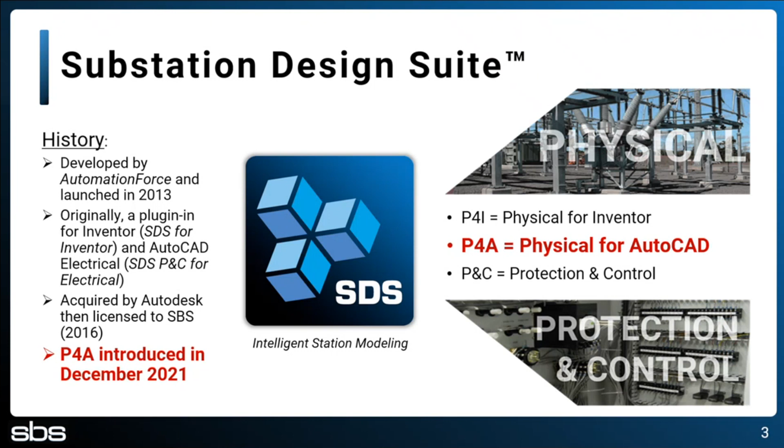Why P4A? So here's a slide where we're trying to show the reasons why we invested into this solution, to be more flexible and also be customer driven. As the customers face challenges, we try to be there with them. We have an estimated about 500,000 people every year, professionals being trained in AutoCAD.

So it's a huge pool of users, great interoperability with civil surfaces in P4A, underground conduits and conductors, georeferencing. There's a lot of capability in P4A that we're just opening up the ability to connect to other tools from there, more direct integration also with the P&C products, the protection and control.

It was a customer requested alternative to SDS in Inventor as well, so this is something that we're, again, doing to keep up with customer needs and wants.

There's also a very big reason for SBS to invest in this, because we are using the code base for AUD, another product for distribution, for all the testing and development. There's a lot of cross-discipline synergies, even users that are familiarized with AUD can move on to P4A, or they can talk to other users that are starting in P4A. So there's a lot of cross-training that can happen.

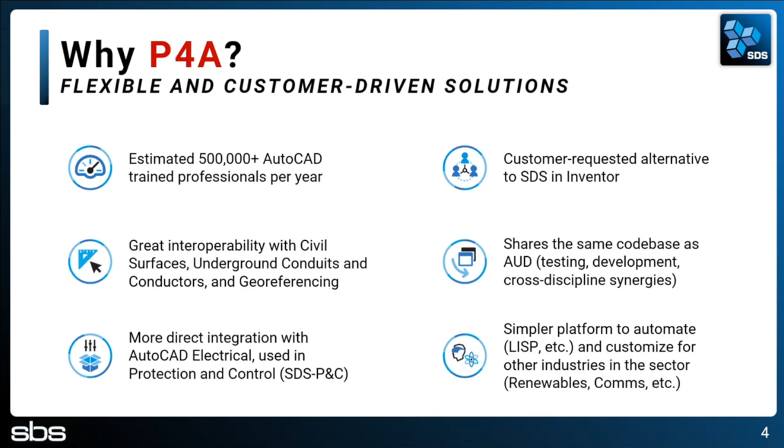At the end of the day, also for future developments, there's a simpler platform in P4A based in AutoCAD Map 3D. We have a platform that can be automated easily, can be customized, and can be also expanded to different industries, which are seeing more attention now.

So P4A has what I like to say 4 pillars here. Just to give an overview for those that are not too familiar, there's an industry model, which is a database embedded on the drawings, a material catalog, which is part of the configuration and goes in your drawings, and a part editor, which you add 3D models that you use as features in your design.

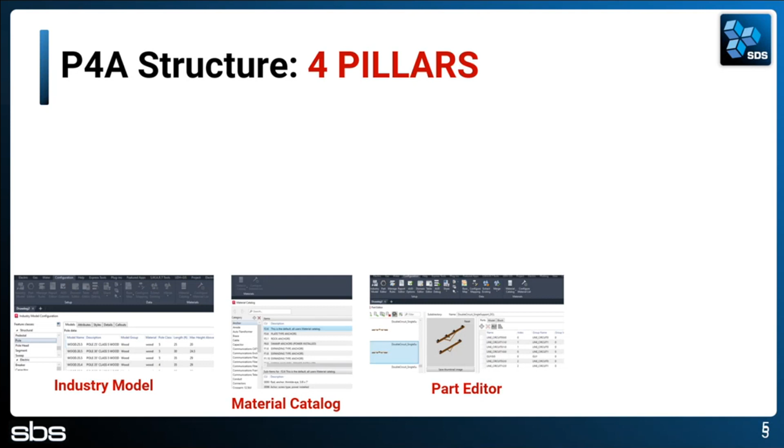And you also have the rules engine, which is where you can really configure a lot of the new functionality or a lot of the standardization, like all the standards from a company can be moved into a rule, and that becomes something that the users will be able to implement without even thinking, because the tools already take care of that.

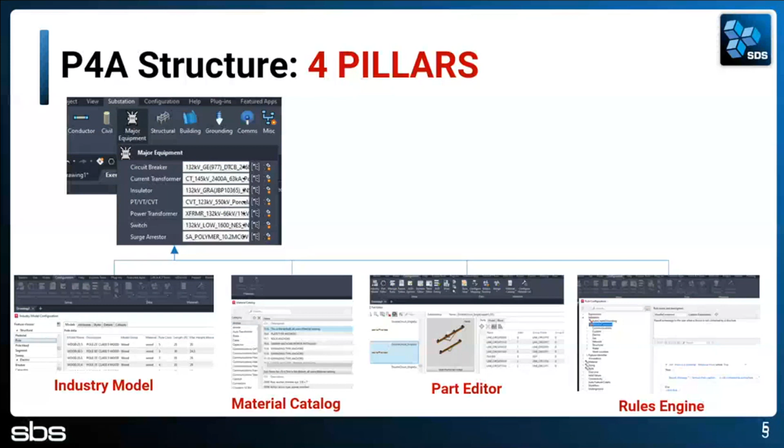So that all feeds into this sort of ribbon, and the pick menu where you're going to be picking your models and features to place them on your design. What I like to say is just pick, place, and connect. Should be that easy to form your 3D models and substation design. Once that is done, you adjust, describe, dimension your drawings, validate, and plot. And there you go, that's how the workflow should be going, right?

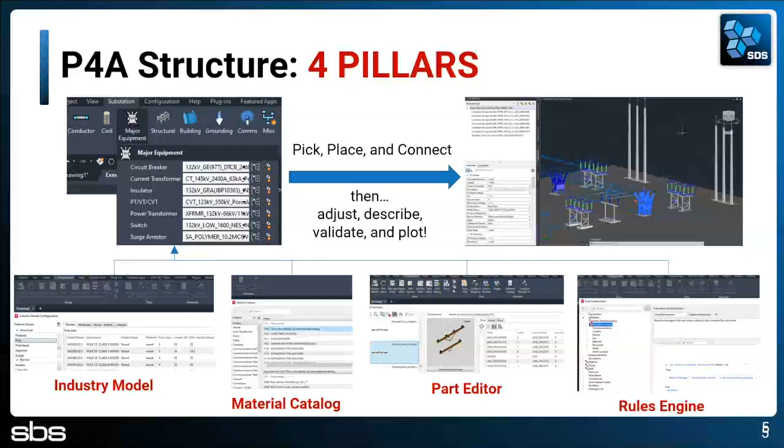So those are the major features. But we're here for a status update, so I'd like to give you some of the recent improvements for the past year, or mostly the past 6 months or so, recent improvements and highlights of those.

I know David also gave a preview of AUD and P4A status update on development, and it covered some of these points, but I'm trying to share here some of the workflows with videos, so for the users to be more aware of how these are actually applied.

So there's a quick little improvement here, which is the recent and saved filter attributes. So this basically saves you time.

Just go through the demo here. So when you're picking, let's say, a circuit breaker, and you have to type in a description for dead tank, and you're doing that once, you're going to place your feature in design. I'm picking something big so it can be easily visualized with an example. And if I want to pick another dead tank, I would have to type it again.

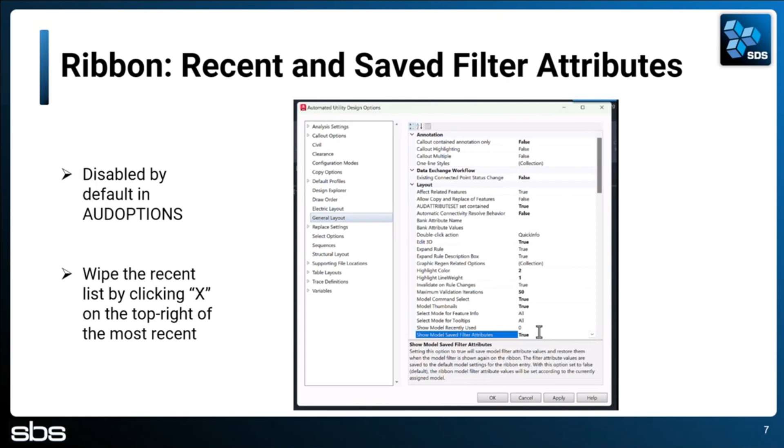So just to save a little bit of time, there's this save filter attributes, which goes into the AUDOPTIONS menu. Scroll down there, you see you can turn it to true. And once you turn it to true, it'll save the last used filter. And the recent number that I altered there will save all the last used features or models that you picked.

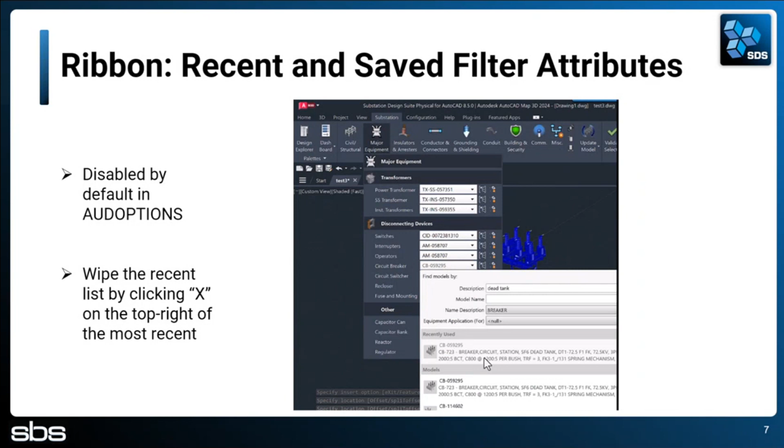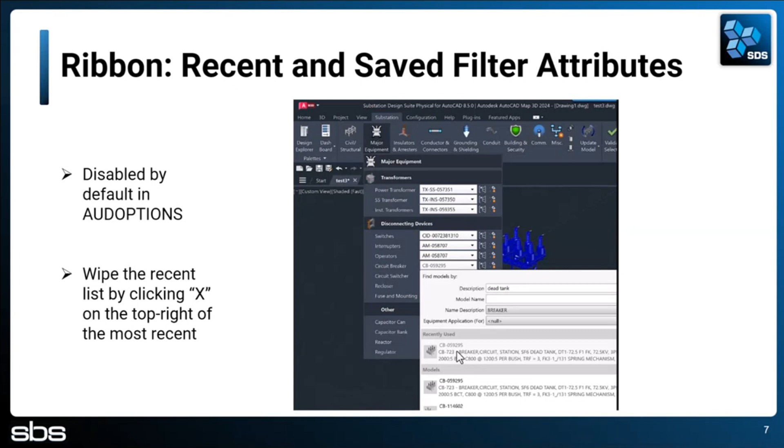So right now, the attribute right away has a description already picked from before, already saved. But once I pick and place a new feature on the design, I go back, I see the recently used. And if you want to wipe out the list, you can always click on the X button that is on the top right of that most recent. So quick and easy, just functionality to save time.

Now, there's another functionality David covered before. I'm going to give a quick example here. When you have, let's say, stacked connectors to bypass, or situations where via design sync, you're trying to match whatever you're designing P&C, and you're trying to keep that in your physical representation. Maybe you need to bypass some of the logical connection there, and you need a different logical connection to the physical one. So I'm going to give this quick demo.

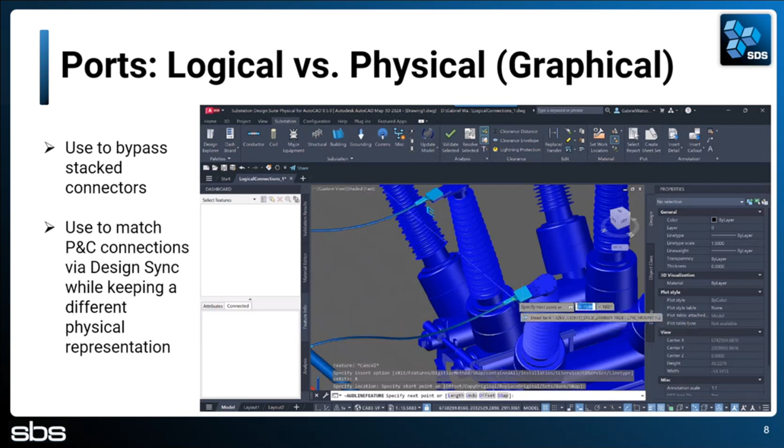So I have a sample that we use for training here. And what I'm doing is I'm going to be placing that conduit there, and connecting to the other dead tank. But at the end of the day, it's just an example to show the cable is going to be created. So the logical and physical connections are created all at once. And if I select, I can see on the dashboard on the connected tab, I can see the connections there between the two dead tanks.

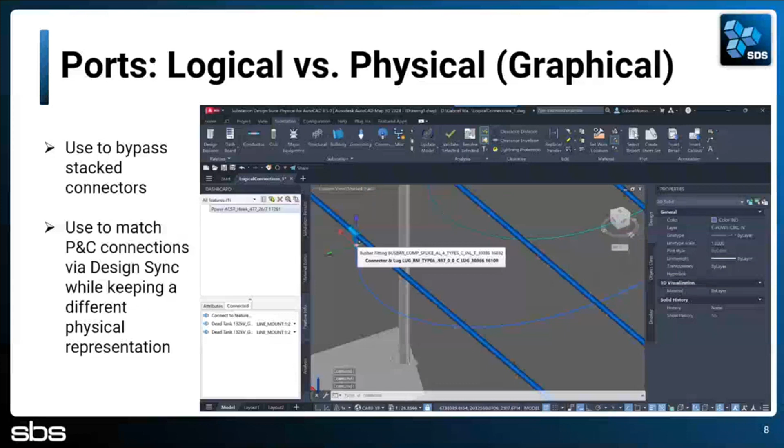And the physical connection or graphical is obvious there, but I can click on the button to remove the physical graphical connection and link it to something else. But that does not remove the logical connection between the two dead tanks. As you can see, they're still connected to each other. So this is just a sort of a workaround if you need to bypass. There are many connectors stacked, or in some situations we found the clients needed to do that.

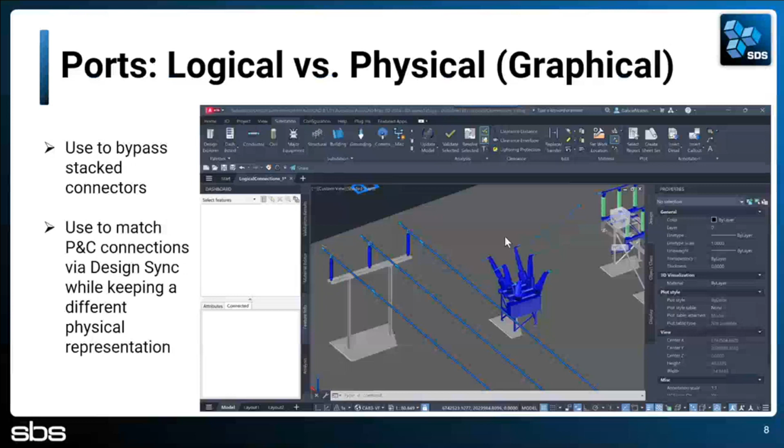There's a demo here on below grade conduit. So by the way, I'm just gonna roll back one second here. Any questions so far? All set. This other demo is about 4 minutes, so let's, I'll try to describe here. So for below grade conduit, there is a new workflow.

First step along the lines is we're setting up the trench first. So we do not want to place the conduit right away. I'm placing the number of rows and columns. I have to place the maximum number of rows right off the bat, number of rows and columns, the maximum that you will be used for the network. And I set some information there as well about the depth and width and the bend radius.

I go through the cables, select the cable that I would like to have, and I have to cancel to go back and draw trench. So that's step one. You're basically drawing a trench with segments, and they don't have conduit yet. We're just setting up a network.

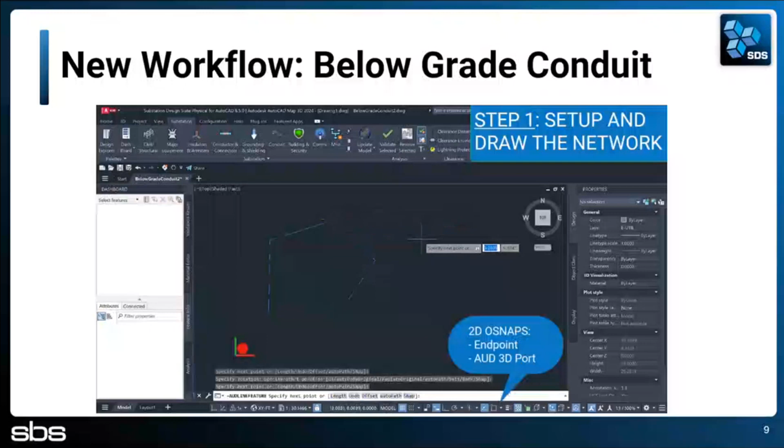And now to create a branch, I need to branch at that location. I'm going to use a 2D OSNAP endpoint and AUD 3D ports. So that creates a logical branch there, which is an intermediate point structure to connect line features. So you have to have a point feature in between. And I'm just going to pause quickly here. This is going a little too fast.

Okay, so the whole reason for setting up the network is now that you have everything laid out, you could have modified it if needed. Now you're moving on to placing your end connectors or your endpoints for those trenches. So here you could have other features already placed, but for this example, we're just using a workaround, placing the endpoints out of the pick menu here, the model selector.

So I'm going to start in this example. As you can see, I have 2 rows and 3 columns. I'm picking in total 6 cables to run. So I'm going to be selecting here a model that has 6 ports to connect to.

I'm looking for a specific one I know is over there I can use, with 6 ports. Takes a couple of seconds to load, and then with the AUD port, snap, you can snap it to the endpoint, and it's just a matter of orienting it correctly.

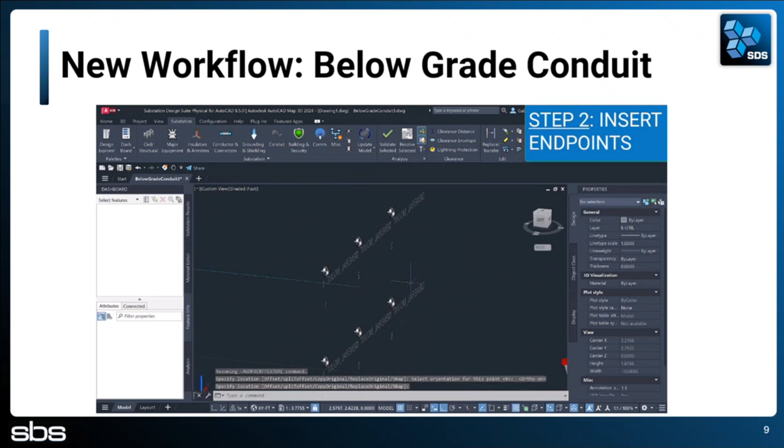In this case, the ports are facing inwards to the line of the segment. For the other ends, each other end will have 3 cables, 3 conduits. So for the other ends, I will have to place a different feature that has 3 ports only.

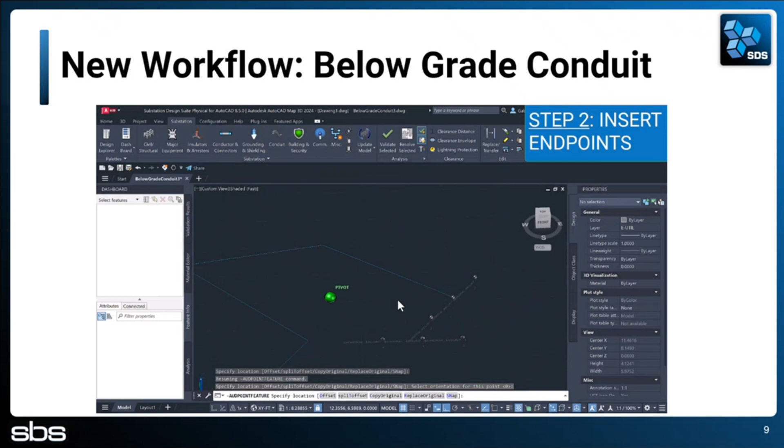I'm not too worried about the orientation right now. Like I said, the orientation would probably be given by another feature above the ground, so you could connect to a real feature. In this case, I'm just showing how the second step goes. You place those endpoints and you move on.

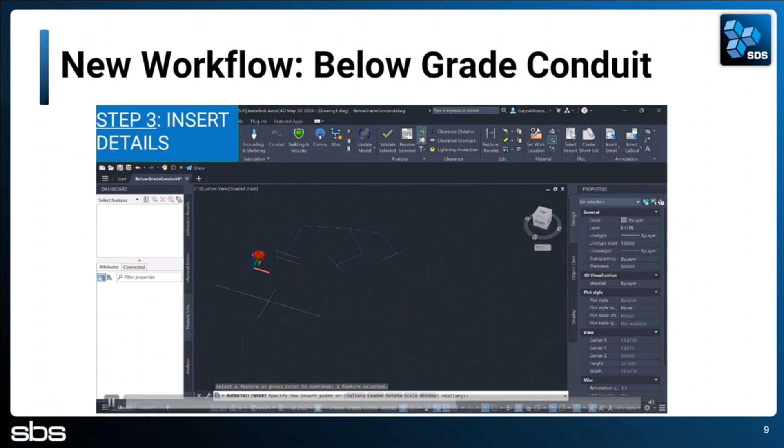Now, I wanted to insert details as step 3, and you'll see sort of a cross section of those trenches before they're filled, which means they're going to be shown as empty, and they're quite big there, so it's easy to see they're empty.

And then we're going to fill those trenches with the conduit, and you're going to be seeing how the details will fill up.

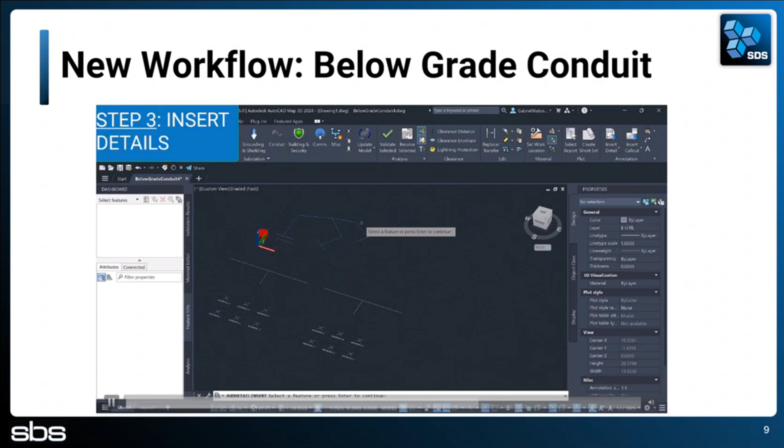Now that's step 4. We're moving on to this here. I'm going to pause quickly. So again, this option here is very important, where you can pick to draw your trench purely.

And now we're finally adding the conduit to the trench. And I'm using a special feature, which is sets of 3, because in this case, very simple example, I have 6 total conduits, but 3 for each branch. So I'm going to fill up each path with 3 cables.

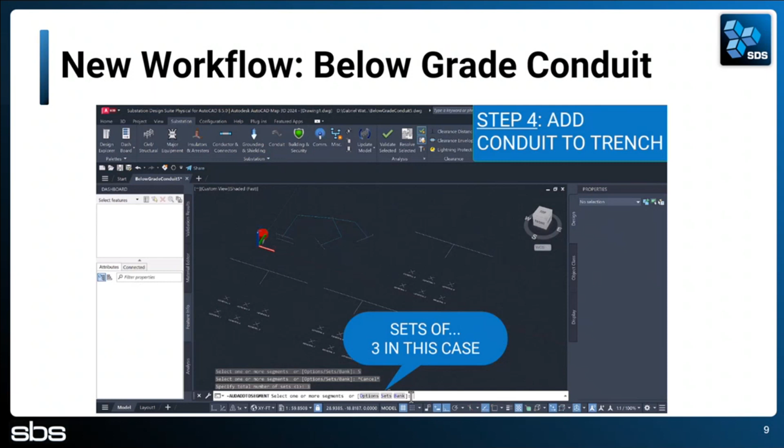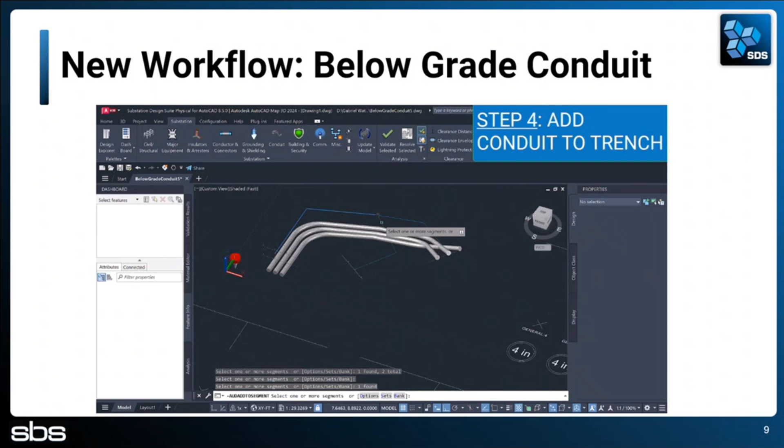And I'm going to do one path at a time. So I have to select one path fully from start to end. It's drawing the cable all the way to the ports, and the second one there.

So after that point, in this demo, I would like to show an optional thing that, in my view, if you wanted to check AUD options, it's available for everyone to change the description of that trench into something more

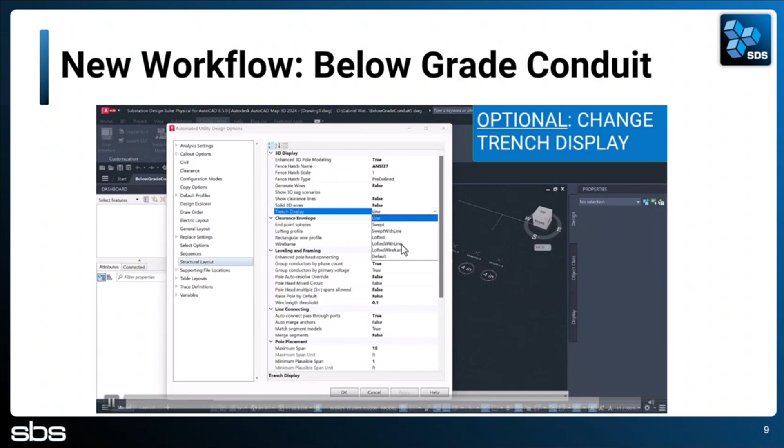visual. So you can change the display to lofted with line. In that case, you have a better idea of the dimension of the trench and where it actually fills up. And there's one final step after you change the AUD options.

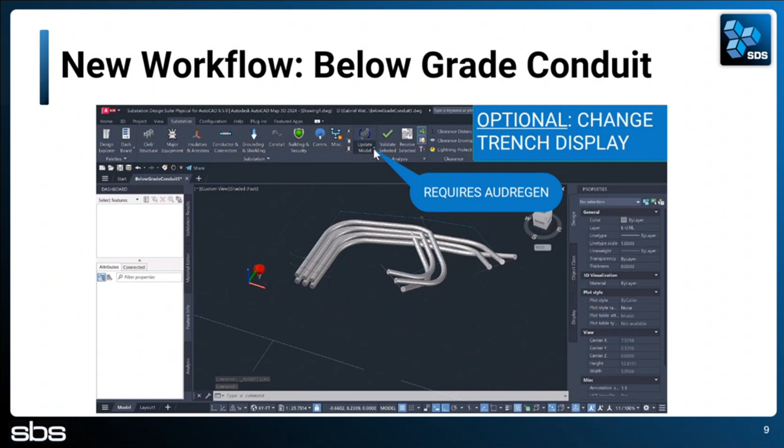You just have to do a AUD regen. So AUD regen basically refreshes your models and loads that up. So that's a quick visualization. Gives you a good idea of spacing there.

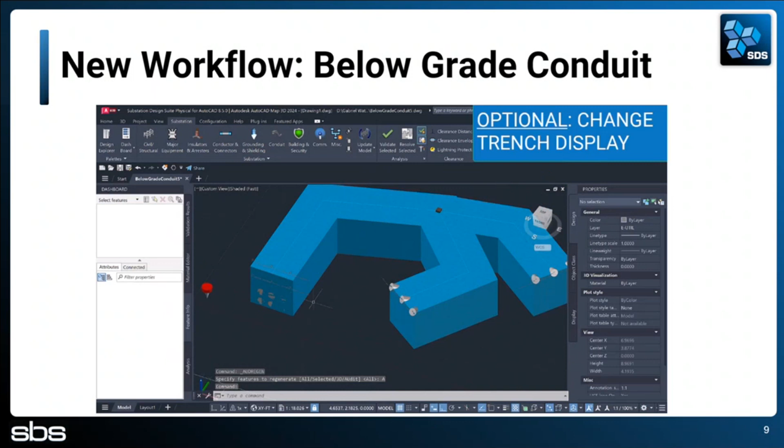So that's not the best example, but it's a very simple idea of how the steps are involved to get to that point.

Moving on to the next. I also wanted to show, this is from the previous example, that this is another option that is new. You can display sweeps as 3D arc solids.

Right now, this is how they come. They come displayed like in multiple segments like that. And this is how they become after you change that option.

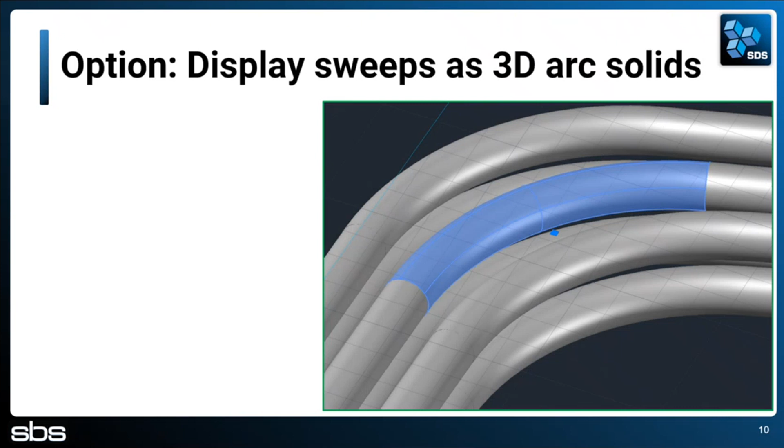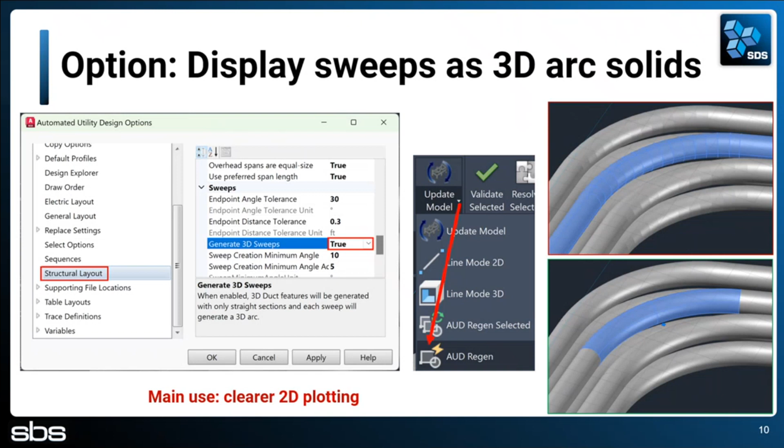So all it takes is for you to change AUD options again. You go to structural layout, generate 3D sweeps, and now the elbows are one solid sweep. And that basically is clearer for 2D plotting, so you don't have multiple little sections as those ribs you see there on the top.

Sorry. Any questions so far? Good.

Paste immediate is a feature I like a lot. Basically you can use copy without having to go to paste. Immediately it'll launch the functionality to paste it.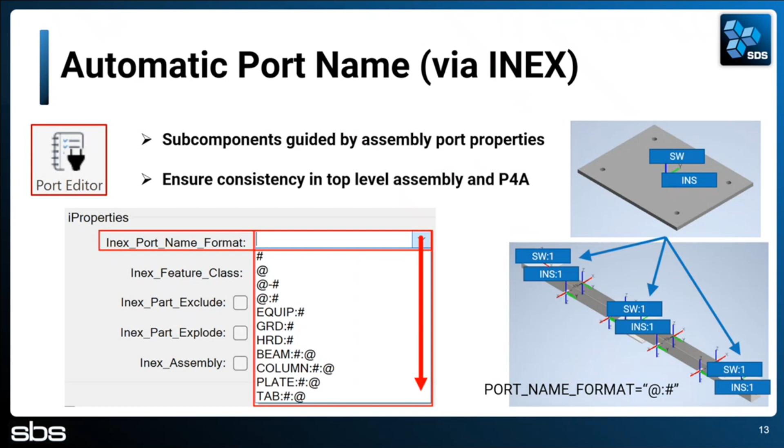It has been there for a little bit now, but it's a way to define your ports at the assembly level, and they'll respect, as you see on the bottom right, the port name format. There are some keywords that will be respected, like the name is the at sign there, plus the number sign, which is for the number of the port. So that's basically how it works.

AUDVIEWSOLIDS. This is another demo I'd like to show a workflow for. This is a very good tool to inspect your 3D geometry. A lot of people might be concerned about performance. You can use it in actually any AutoCAD drawing. So if you are building individual parts or entire substations, you can select which components you're going to test with. Let's jump into the example here.

We have a little bay to test with, and I'm going to run over the different options we have. This case here is solid. I'm selecting a couple of features, and I just want to explode them. So you select basically a base point, and you explode them to see all the solids you selected, so you have a better notion of what's involved there. And it will give you also how many objects were selected.

And geometry gives you more than just solids. It'll explode the entire geometry, so the line features, and the edges and vertices.

And the other feature here, which is really interesting, is you can actually export a report. Let me pause here for a second. So you can export to CSV format your entire substation or a small item and see the exact impact of FEV - we call it faces, edges, and vertices, FEV count. You have this whole count, which gives you an idea of what are the biggest performance killers in your design. It's a very good tool, in your pilot projects, maybe you're trying to get your content in and filter what are the biggest pain points for performance. You can use this tool.

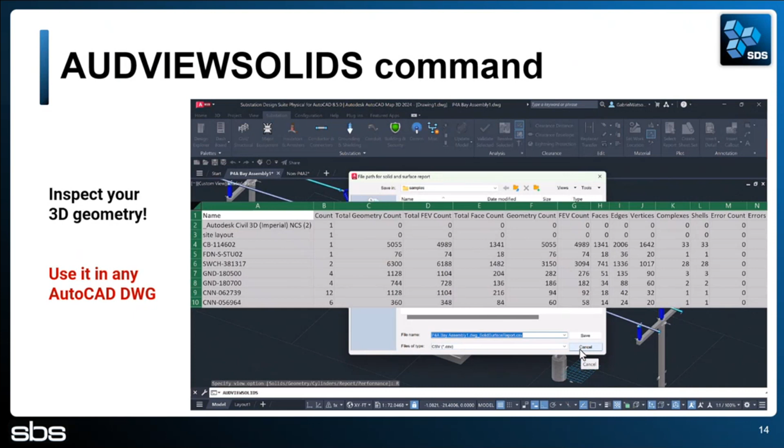And lastly, there's the performance option, which is within P4A, you'll get a result that you can read from there. In this case here, the performance is more in terms of milliseconds and how long it takes to rotate and create, let's say, orbit or zoom around your station.

So it's not as much about just the FEV count, but you also have to know that sometimes the number of faces or edges might be high, however you have good performance, so you don't have to really do a lot. Or maybe there is something that is very low on FEV, but you still have an impact on your machine. This is also PC specific, for each computer, so you can test with different users. And FPS, frames per second, is also a good count to be aware of.

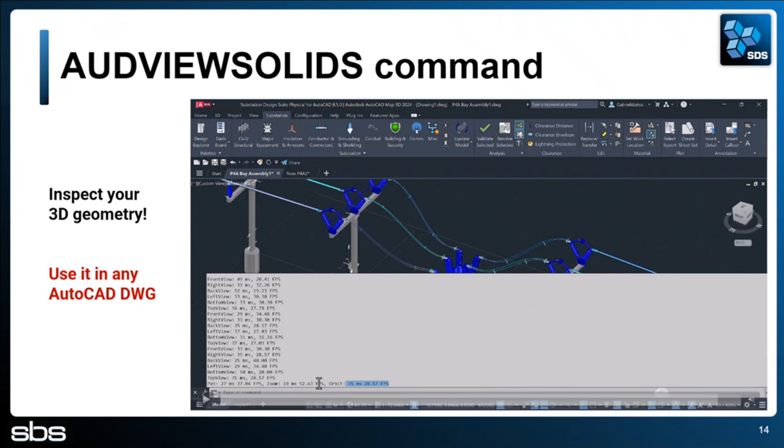So again, this is a good tool for those that are building their library, their content.

Let's move on to another interesting tool. If you have a crash and added something into your industry model but did not save your design or drawing, now you have a way to recover that. Let's go to the example.

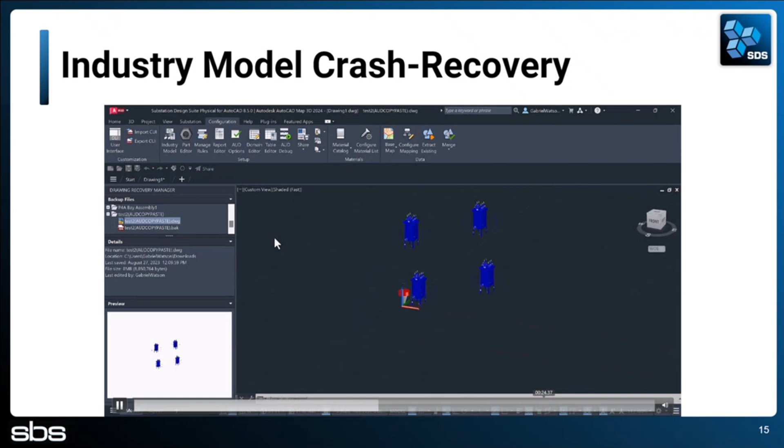Now I'm opening AutoCAD again after the crash. I get the drawing recovery manager as usual. But when I open that, P4A will recognize there was an industry model database associated with that drawing. You may have lost something, and it will prompt me to recover it. You can recover or delete it. Sometimes you don't need to recover, but just to be safe, and there you go.

It recommends performing an AUD regen because the connection to the database may need to be refreshed. So let's go to the next one.

Now we're going to show a bit of the content building workflows and how to be efficient about it. We're not just focused on products in terms of software, but also applications and websites, trying to provide content, training, and documentation in every possible way to add value for users of P4A. Utilitycontent.com is well known for P4I users, for the inventor side of substation design, but now we're trying to start adding P4A ready parts as well.

This website lets you browse through OEM approved 3D models. It's a very large library of components for the industry, and you can customize some of them using configurators, changing sizing and other options depending on the application. We recommend you check this out.

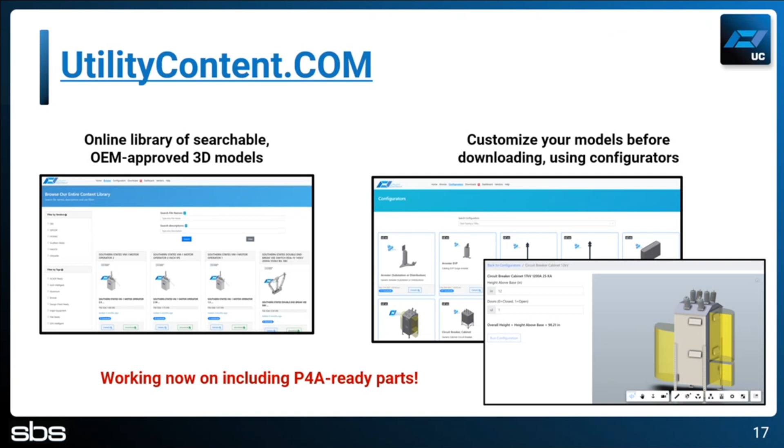And soon, we don't know exactly how fast we'll deliver this, but we're working hard to deliver some P4A ready parts so you can implement them into your content as you're building your P4A models.

Next is the INEX export for P4A. Just a little demo of what can be done if you already have content in Inventor, or if you prefer to use Inventor for simplification of models. There are a lot of tools that allow fast simplification in Inventor, so there's good synergy with it.

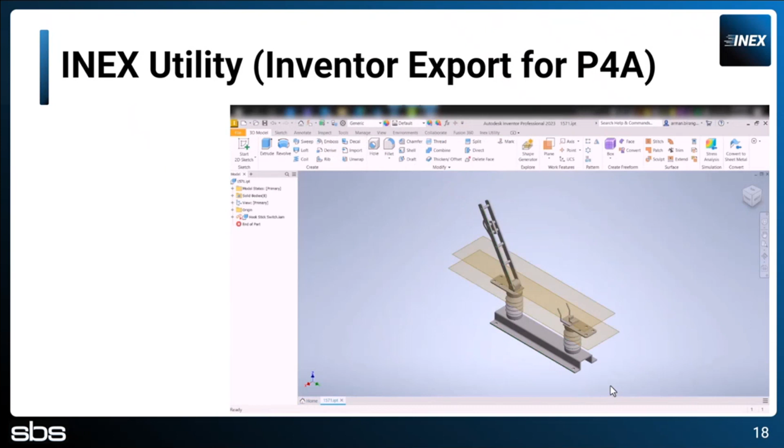Here's a demo, I think Jim recorded this one. Basically it shows the functionality: you load a model, and this one came from utilitycontent.com. You can download it from the website, and you're adding ports, which are the connectivity points, the snapping points for P4A. It's usually quick and easy to add the ports. You have to configure some of the iProperties so they're all ready to go when exported to P4A. That's what the demo is showing right now.

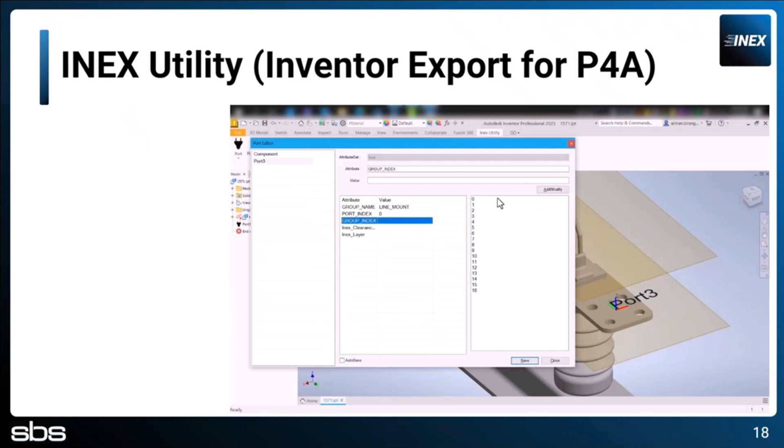You're adding some of the names and indexes for the ports, which are important, and it's all standardized. You have to follow a standard, and across different companies, most use similar standards for that, so we can help a lot since we've seen good practices with this.

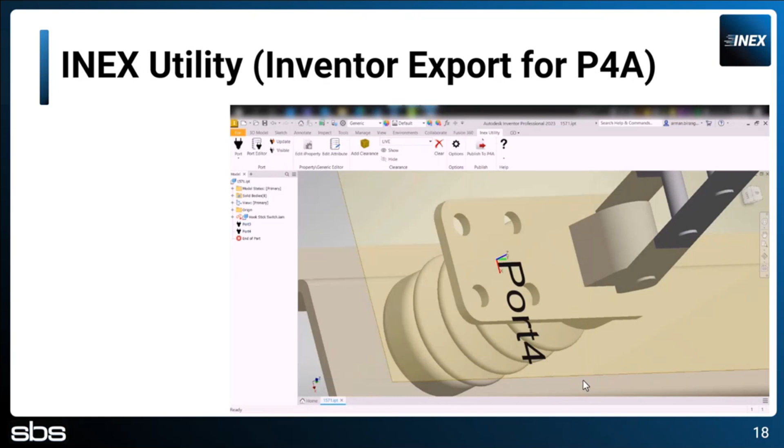There is a document coming soon that we want to share with you covering all the content building workflow, coming from Inventor and soon also from AutoCAD, showing how to use this tool.

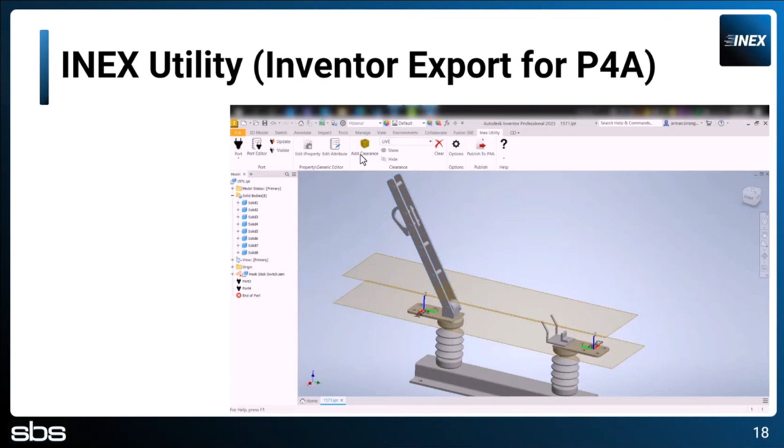At the end of the day, once you add your ports, you can add the clearances, setting up which areas of the model are live, which are grounded, and which are insulated. You can also add layers or attributes for the layers that will be applied once you import that into P4A.

So you can set up almost everything you need for P4A in Inventor, and it's quick and easy. It creates an export in a format called INEX, which is a format that P4A will import through the part editor.

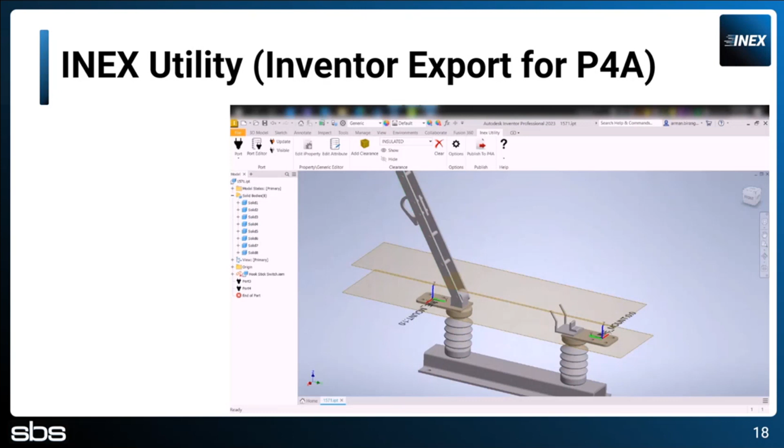Just to show one more thing here, this is the document I was talking about, coming soon. We wish to release this in the coming month or so. There is a part builder guide that displays this functionality.

Yes, Tilak, you have a question?

The INEX example I'm showing here is just illustrative, and there are more tools. It has been made a lot more robust after this release.

So the part builder guide, just to go back to this, is coming soon. It's something that will help explain how to simplify your parts once they are downloaded from the web, once you get them from OEMs. There's a lot that Inventor can help you with. I was part of the team writing this builder guide, and I'll be happy to share because it'll be of great value.

So the part editor, for those that haven't seen it, here's a little quick demo. This is functionality within P4A where you can import the INEX file that was exported from Inventor, or through the part editor, you can also add AutoCAD-based parts. What you do here is associate those parts to models, so they're ready to go, associated to your database of models that can be applied to your substation.

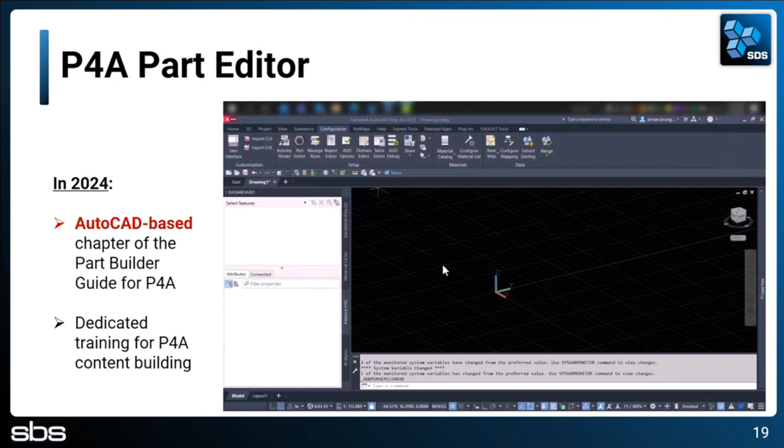So again, we create parts. Parts are the 3D geometry. You add the ports to them, so the connectivity is there. The metadata, you make sure the metadata matches the model that they are going to be associated with. Once everything is ready, they can be placed on the model selectors, and from there you can place the models and create your design with them. So that's the little example.

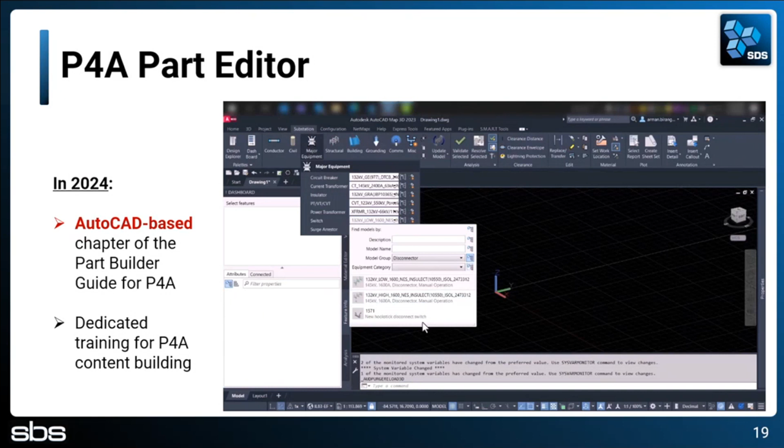On the left side, what I'm also showing is that we have this part builder guide being developed mostly now to show how to simplify models coming from the Inventor INEX tool, but also there's a lot to add on AutoCAD-based part building. And that's going to be coming up in 2024.

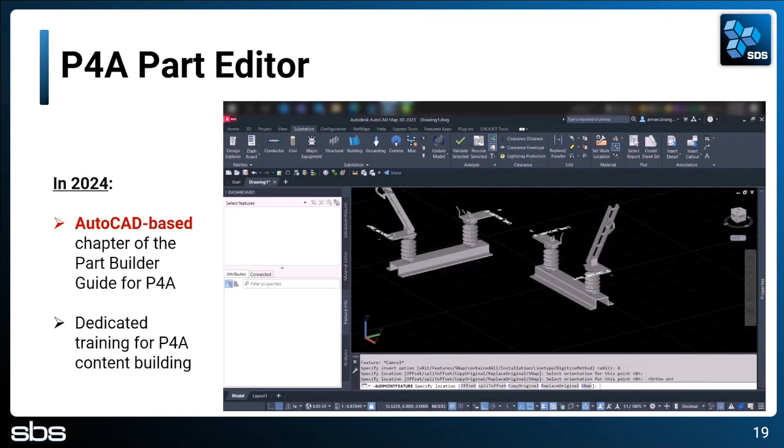And there will also be, and I'm going to speak more at length in the next slides, about our training for next year. So we have sort of planned our learning path in a different way now.

We have been training P4A in sort of a be-all end-all course, and from there a lot of clients sometimes take mentorship, sometimes they're already good to go. Others might take the video lessons we have, and they also fly with that. We've seen great results out of the box even.

But we have a learning path that helps larger teams, or teams that have a better idea of their standards and where they want to arrive. This will give you more information on how to get there. And we would love to have some idea of your feedback on this as well.

We want to break up the learning path into blocks that might make more sense for large utilities or larger groups. So we understand that a lot of the production users are basically users that are not CAD admins. They're not going to be diving into the part building side of things. They're not going to be creating their own rules.

So we want to provide a quick and easy production user course. Any junior co-op can take part of it and start producing in P4A.

And then we have the part builder e-learning, which we want to have about 10 hours or so. This is an estimation, just an idea. We have a plan to get this content in videos so it can be easily shared on our platforms, AutoCAD based or Inventor based, leveraging INEX.